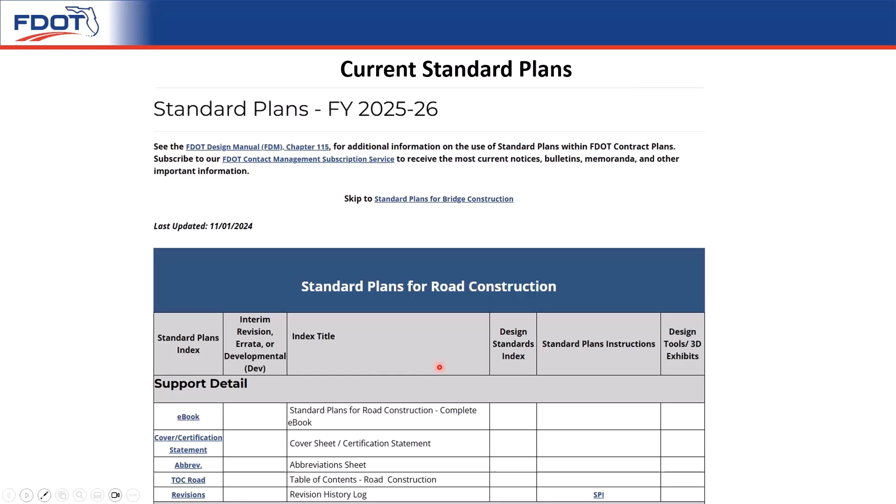You can see that we have the Standard Plans number and the titles listed here. We would also list any interim revisions or erratas in this column. Currently, we don't have any interim revisions or erratas for this edition, but if there were any, they would be listed here.

The Standard Plans instructions accompany the Standard Plans indexes and tell you information on the design criteria, pavement, etc. We would also have the design tools, if there are any, listed here. You can see that there may be a design tool spreadsheet, or there may be a 3D exhibit. It would be in this column for whatever index you're looking for.

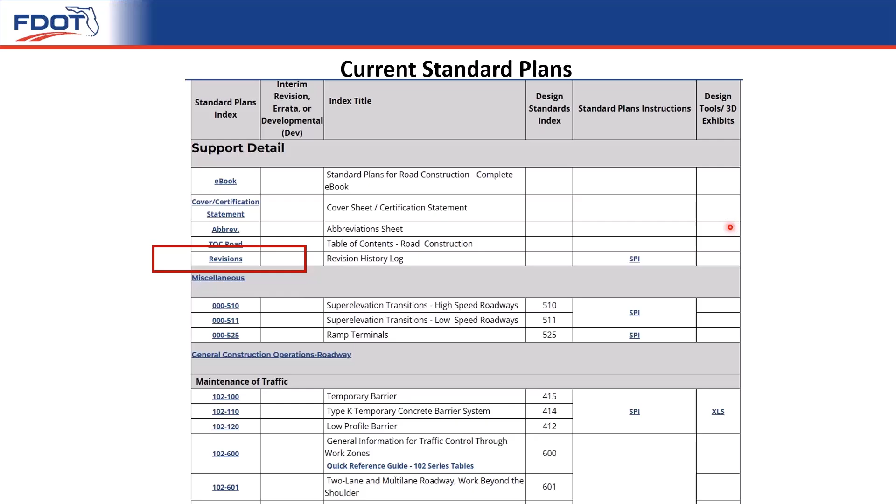Next, I want to highlight the revision history log. This is important because it's a complete list of the changes to the indexes for the year. This update that we're giving you today does not cover every single change, but the revision log does, and it goes index by index, sheet by sheet. So it's a great resource to go check and see what changes have been made.

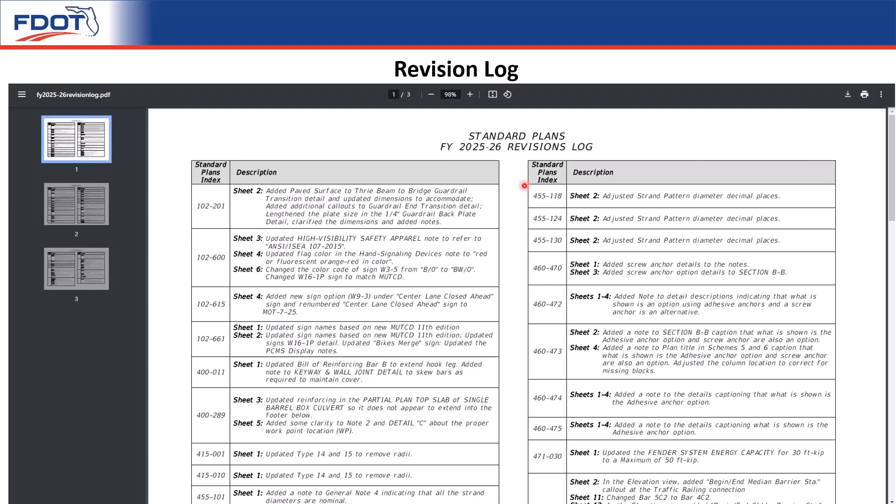Okay, back here on our Standard Plans website. Next, I want to show you the list of the previous editions of the Standard Plans. All of the versions of the Standard Plans can be found here. Back in 2018-19 was our first edition of the Standard Plans.

We also have the link to the CAD files for those standard plans here. You can use this link to see all the interim changes to the standard plans. We don't do a lot of interim changes. Interims require a bulletin, and mostly we'll try to update the standard plans within errata that I discussed before. But if there are any interims, they're listed on this website. We also have the link to the bulletin that releases the standard plans for that fiscal year, and the effective date of those standard plans.

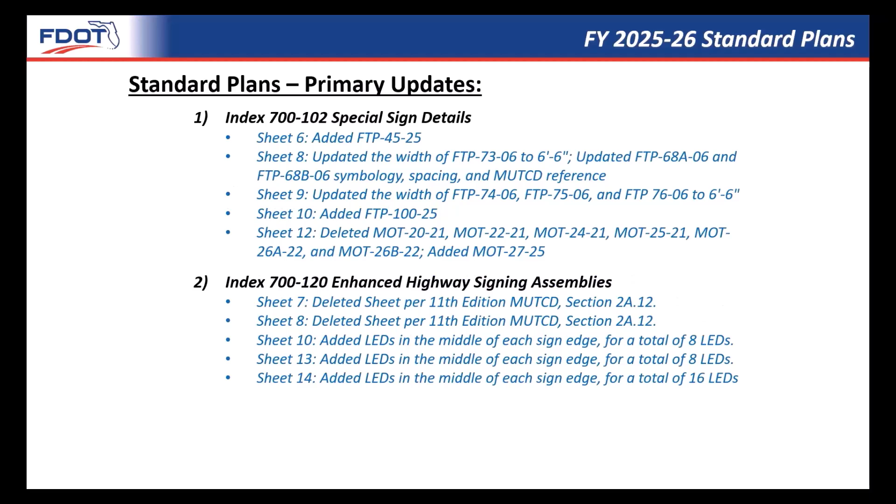In December of 2023, the Manual of Uniform Traffic Control Devices, also known as the MUTCD, updated their book to the 11th edition. Most of the updates I will be covering are to make our indexes consistent and compliant with this 11th edition. Here is a list of the following topics I will be covering: Index 102.600, 102.615, 102.661, 700.102, 700.120, 700.010, and 711.001. Our first index is Index 102.600, General Information for Traffic Control Through Work Zones.

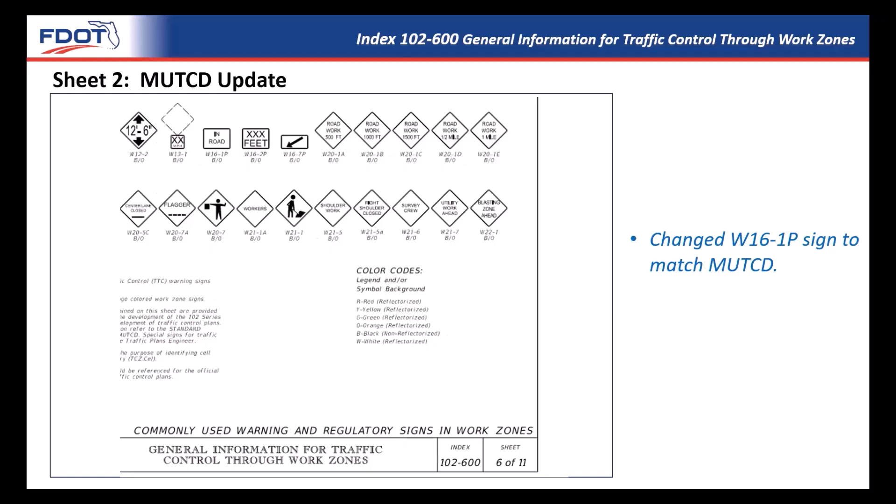On this sheet, we updated sign W16-1P to match the graphic from the MUTCD. So on the old sheet, we have the Share the Road sign, and on the new one, it's just the In-Road sign.

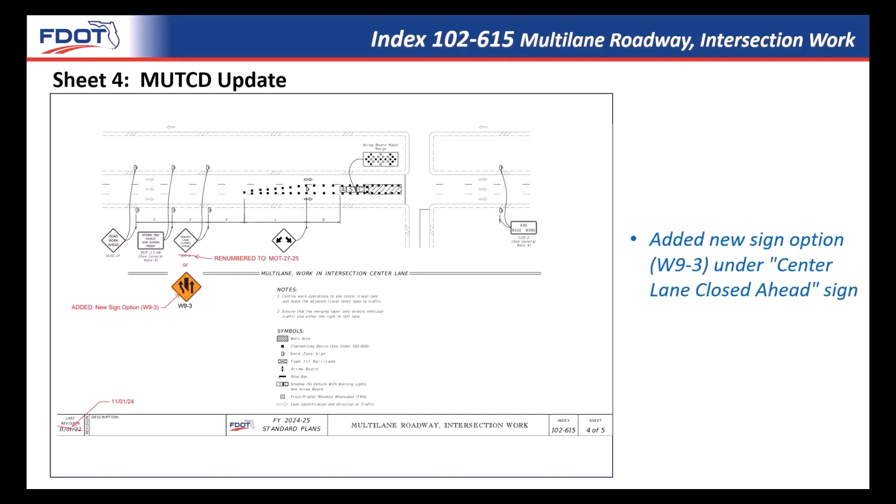The next one is Index 102.615, Multi-Lane Roadway Intersection Work. On this one, we added a new sign option, W9-3, under the center lane closed ahead sign. We also renumbered the older sign to an MOT number and gave you the option to use both. Here in our new book, you can see both options.

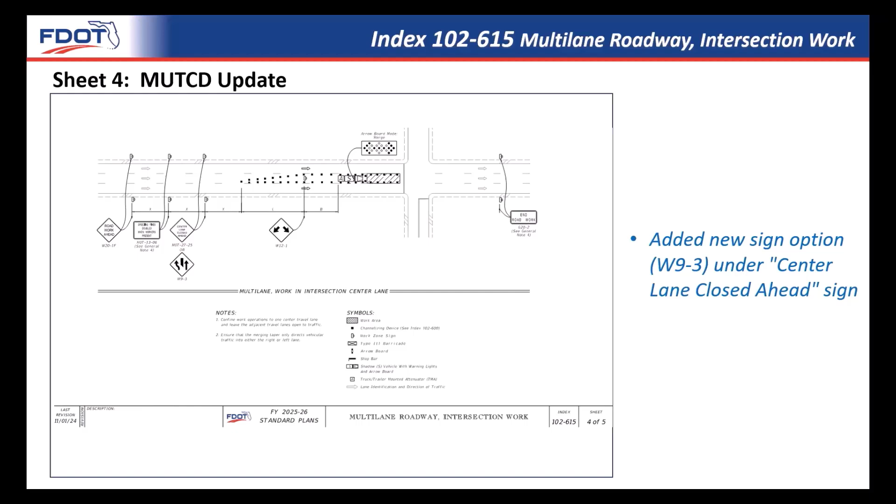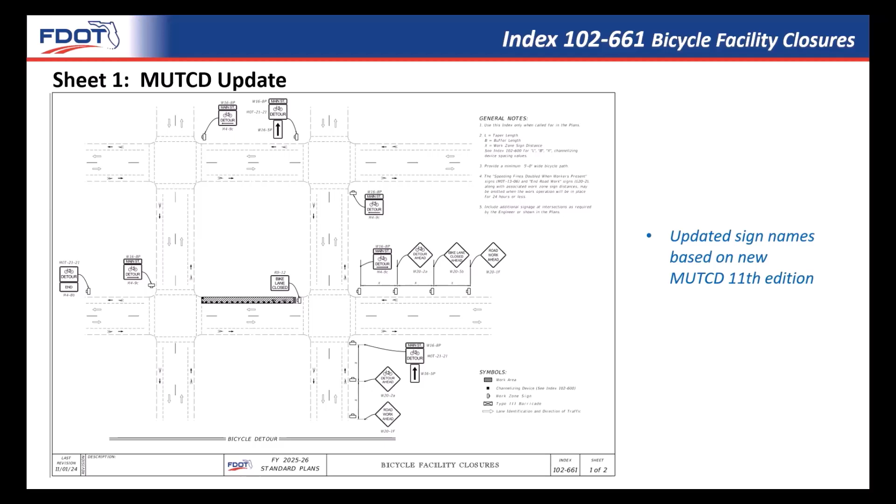Here you can see those new sign names on our new sheet. On sheet 2 of that index, you can also see that we updated the sign names to match the MUTCD.

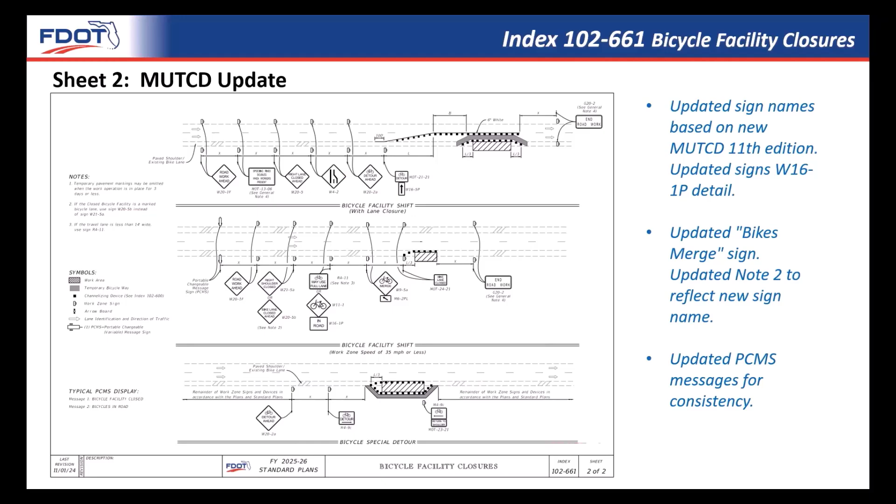We also updated the sign graphics on W16-1P to take away the Share the Road sign and change it to the In-Road sign like we showed on our previous index. We also updated the Bikes Merge sign to have the sign with the picture of the bike versus the word. You can also see that we updated the notes to match these changes. And here's the new sheet where you can see the new sign graphic and new sign names.

Up next is Index 700-102, Special Sign Details. On sheet 6, we added this FTP 45-25 sign. It's a Florida law buckle up sign that you would see at truck stops.

We also updated the sign name of the one before that to FTP 44A-25. And then we moved FTP 51-06 to sheet 7 to make room for the new sign. Here is the new sheet 6 with that new sign added in.

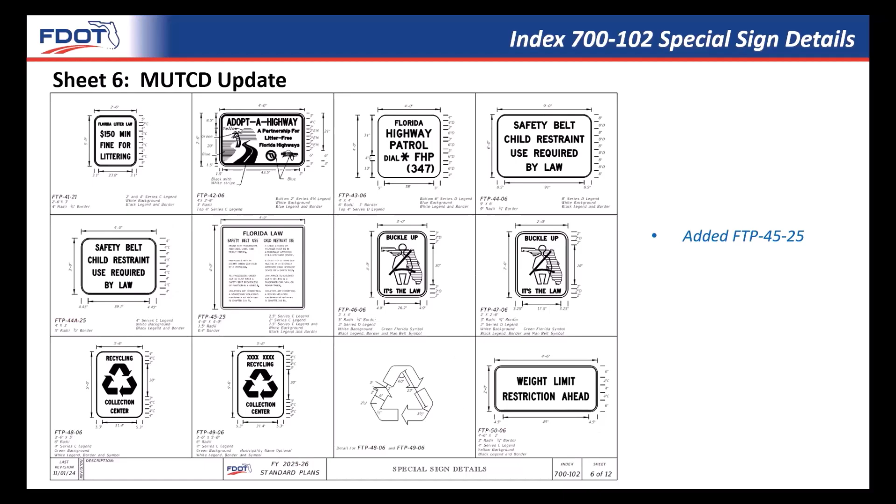On sheet 8, we updated FTP 68A-06 and FTP 68B-06 to match the symbology, spacing, and reference on the MUTCD.

We also updated the dimensions to FTP 72-06 to a 6-foot 6-inch sign in compliance with the MUTCD. These specific changes were done in coordination with the Traffic Engineering Research Lab. And here you can see the updated sheet with those new signs and a few signs shifted over because of that sign we added earlier.

On sheet 9, we updated the dimensions of FTP 74-06, FTP 75-06, and FTP 76-06 to be that 6-foot 6-inch dimension as we did on the previous sheet. And here is sheet 9 with those new dimensions.

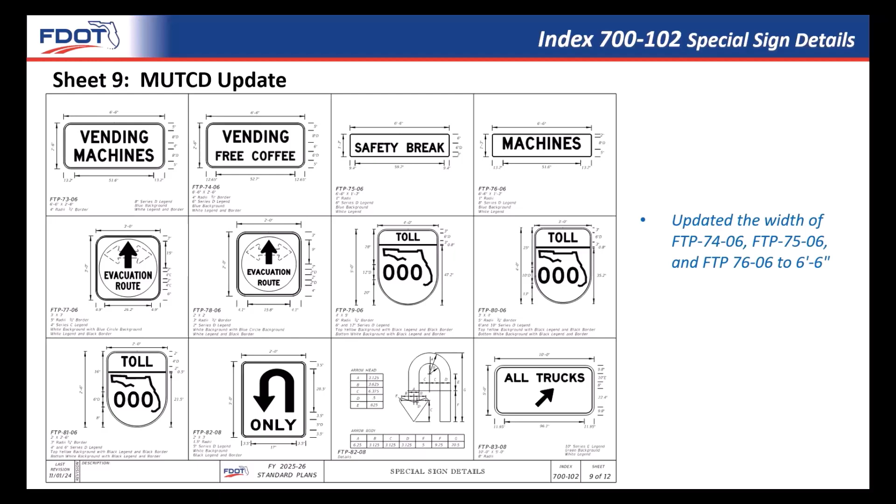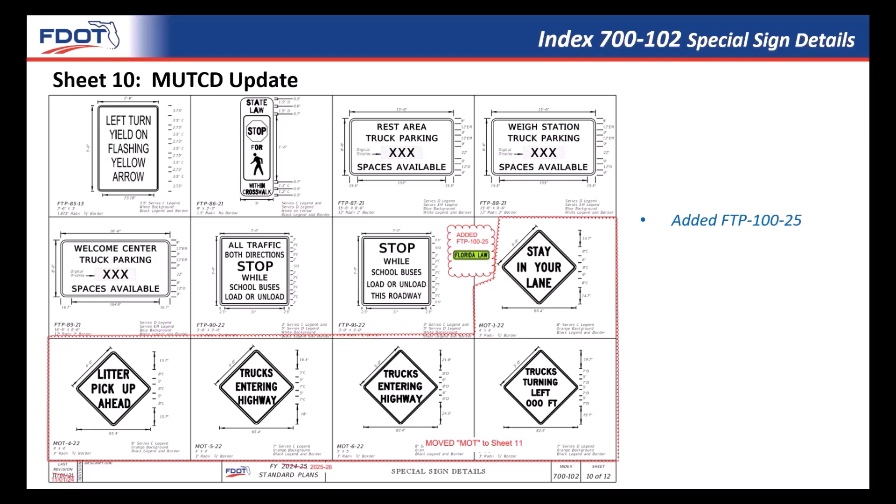On sheet 10, we added this FTP 100-25 yellow Florida law sign. And then we moved all of the MOT signs from this page to its own sheet to make it more clear through our standard plans. You can see that here.

On sheet 12, we deleted multiple signs. The 11th edition of the MUTCD now includes work zone bike warning signs, which means some MOT signs shown in this index can be deleted. Additionally, the 11th edition of the MUTCD includes temporary traffic control typical applications for work in the vicinity of bicycle lanes and shared use paths, which specify what warning signs need to be used and where they should be placed. Consequently, the bike lane closed ahead plaques, MOT 24-21 and MOT 25-21, will no longer be used.

We also added in the MOT 27-25 center lane closed ahead sign. And here is sheet 12 with those deleted signs and our new added sign.

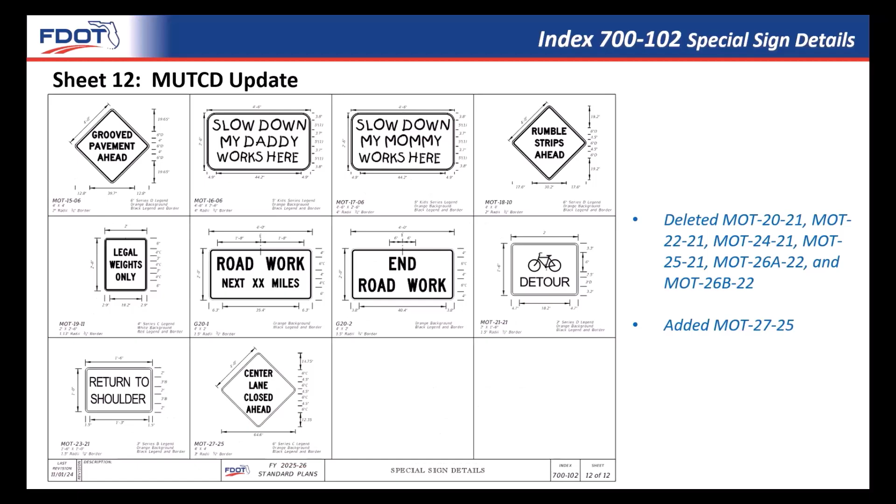The next one is index 700-120 enhanced highway signing assemblies. We deleted sheet 7 per the 11th edition MUTCD section 2A.12. We also deleted sheet 8 for that same reason.

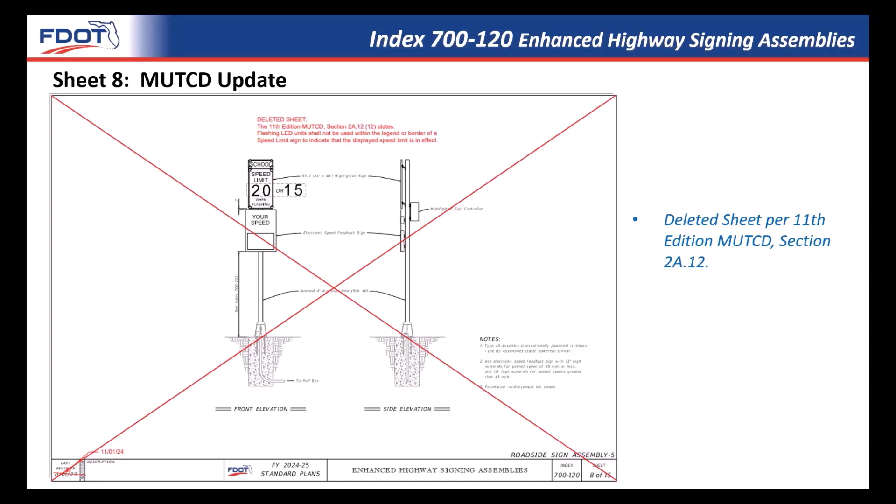On sheet 10, we added LEDs in the middle of each sign edge for a total of 8 LEDs in this wrong way sign. You can see that update here with all 8 LEDs.

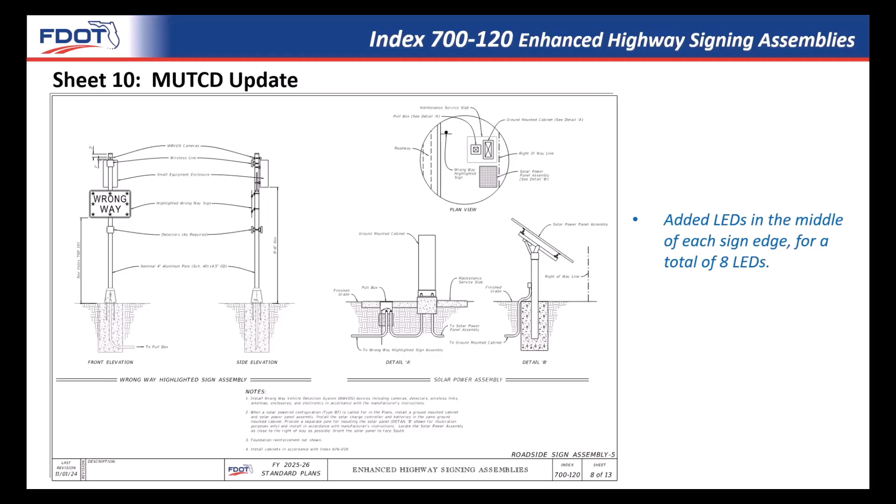On sheet 13, we added LEDs in the middle of each sign edge on the Do Not Stop on Track sign for a total of 8 LEDs. And there's the update to that detail as well.

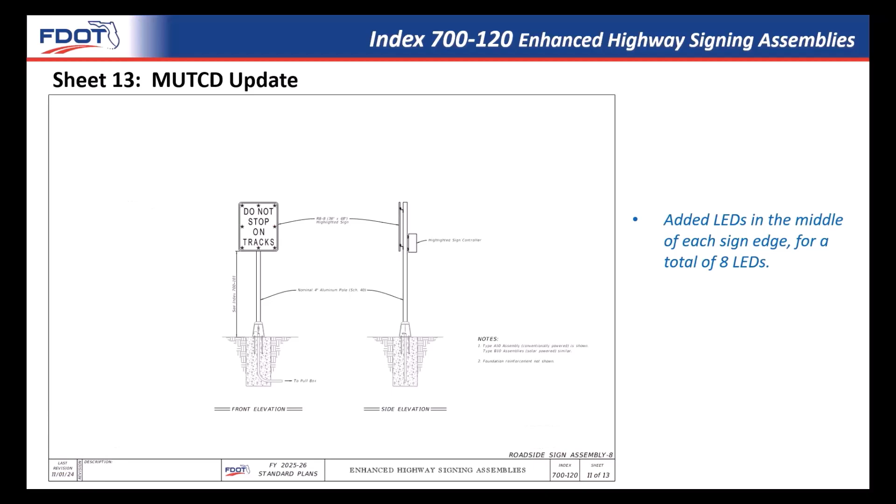And finally, we have sheet 14 where we added LEDs in the middle of each sign edge on the stop sign for a total of 16 LEDs. And you can see that here.

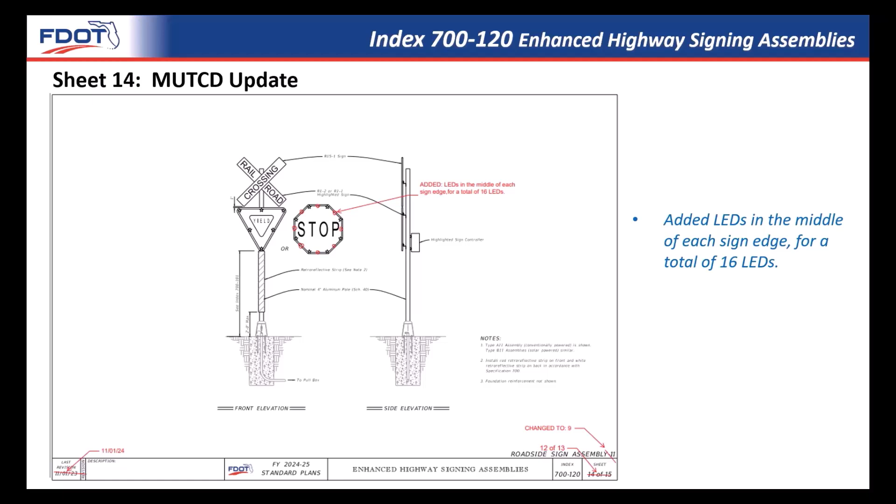Next, we have index 700-010 single column ground signs. On this index, we updated the flip sign to allow for multiple sign panels, removed the diamond sign panel, updated note 1 to say install sign with the ESU sign panel in the undeployed up position. We added note 5, which says multi-sign panel assembly only, use one of the following approved sign messages, actual sign may need to be scaled: FTP 43-06, FTP 47-06, and FTP 66-21. We also added ESU to the sheet title.

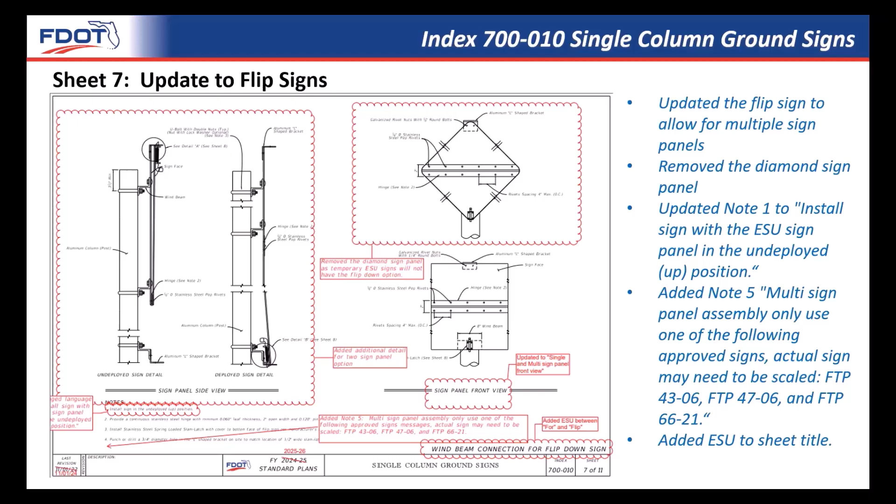The changes to this index are coming from the head of Central Office Traffic Operations Office based on a request from the District Traffic Operations Engineers to allow for multiple sign panels on the ESU flip sign. We updated the standard plan to allow for 2 sign panels, and this was approved through the Traffic Operations Office. We also removed the diamond sign panel as this is not used for permanent ESU signs. And here is that new index with those updates.

The last index I'm going to cover today is index 711-001 pavement markings. On this sheet, we updated all references of buffered express lane to managed. So you can see where it says buffered has all been moved to say managed express lane.

We also updated the express lane markers to be tubular markers and deleted some outer lines on the detail to match the detail of the whole picture.

This was done in coordination between FHWA and the FDOT Traffic Operations Office, which resulted in changes to the FDM and TEM to make them all coincide with the MUTCD. You can see that here, where they now all say managed lane instead of buffered express lane.

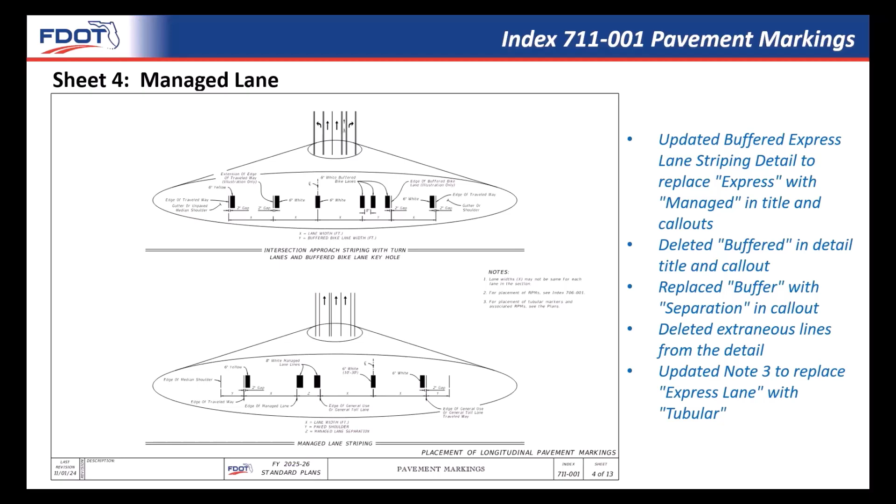For the fiscal year 2025-26 Standard Plans update cycle, I was primarily responsible for the following: temporary barriers, concrete barrier at toll sites, guardrail connections for existing bridges, fiber optic splice vault, standard aluminum lighting, and the utility conflict light pole. So first up is the Index 102 series, temporary barriers for MOT or maintenance of traffic.

We've made some additions to the standard plans instructions. This addresses the single slope connections and some constrained conditions. So in the standard plans instructions for the 102 series, we've updated Part A.

And that would be very similar to the F shape or the vertical shape. That's basically shown on the left here. These details are copied directly from the current 102 series.

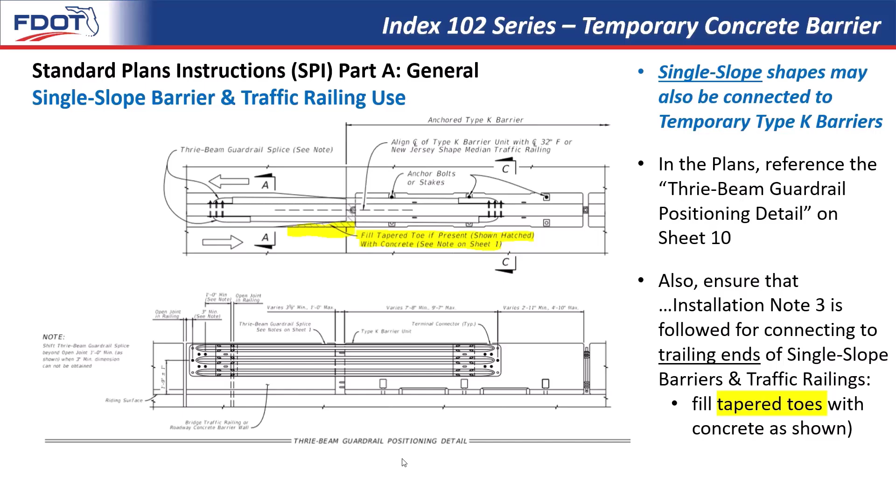For traffic moving from left to right, that's just to prevent any snagging on the toe of that temporary type K barrier, so you just go ahead and smooth that out. So again, you can show a connection to single slope in your plans currently, and that's fine so long as you just reference this Thrie-beam guardrail positioning detail.

Next up, we're still in the standard plans instructions for the temporary concrete barrier, the 102 series, and this time we're looking at Part B for shielding hazards.

In this case, we wanted to add some additional clarity on what's needed for the length of these barriers. Previously, it had just given some information on meeting the length of need, like you would design for a new permanent barrier. But for the case of temporary barriers, some additional considerations and leeway is given.

So we went ahead and defined that to better work with the standard plans index details. The first goal, as with any barrier, is to meet the full length of need requirements wherever possible, wherever there's no project constraints. If constrained conditions are present, then you follow the updated SPI guidance, which is shown at the left.

So just so you all know, this drawing is from index 102-120 for the low profile barrier, for a driveway, showing work area behind it. Essentially, if you're to end the barrier and start the barrier again this way, that is acceptable, and so the notes cover that.

So again, this new text reads: for constrained conditions that prevent meeting the full length of need, such as those required for median openings, side streets, or driveways, extend the barrier to the farthest extent possible while providing for the safe movement of traffic.

We mentioned those side streets or driveways, which alludes to the index drawings down here that explain how to handle a driveway. And then another consideration for the taller barriers, when they're placed in the median, you'd consider those clear sight triangles per FDM 212.11. So we went ahead and mentioned that.

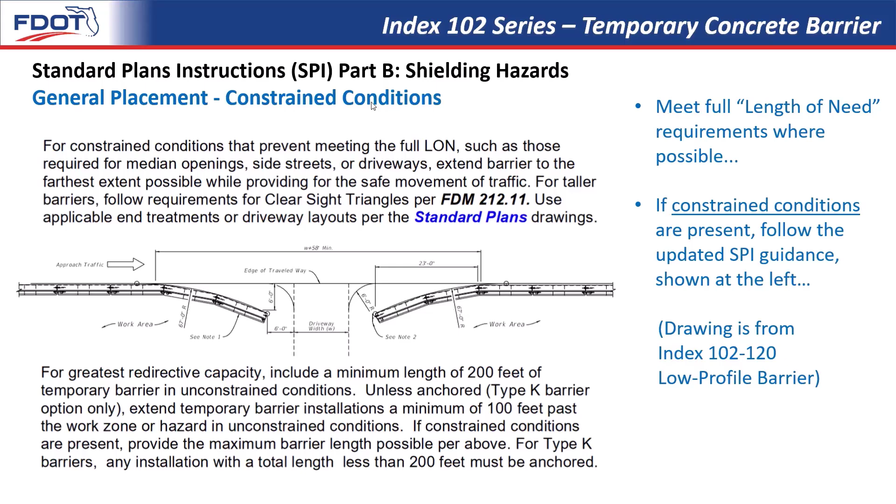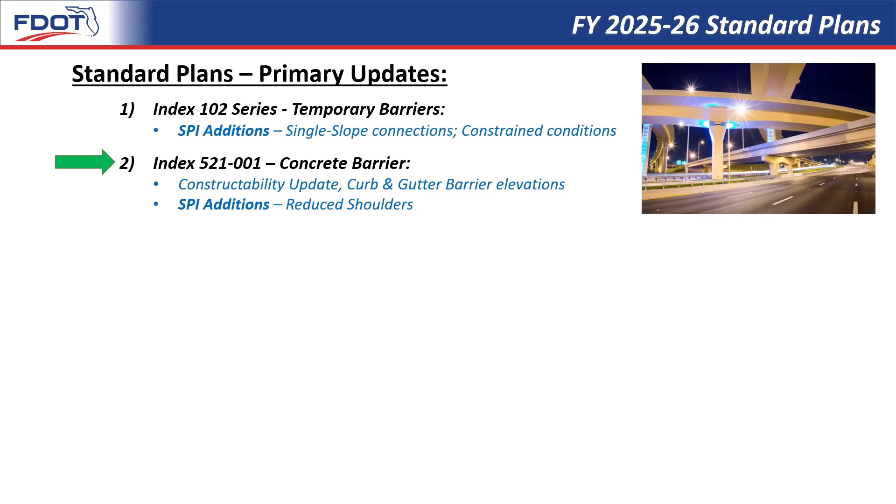Next up, we have Index 521001 for concrete barrier, where we've given a small constructability update, and we've added an elevation requirement for the curb and gutter barrier. Additionally, in the standard plans instructions, we've added some information for reduced shoulders.

First up, here we are looking at sheet 20 in the standard plans index for curb and gutter barrier. The maximum elevation has been added for the finish grade or the sidewalk that's right here behind this barrier. The finish grade elevation, including sidewalks, is 7 inches max above the footing. As you can see right here, this little elevation has been added, and that's basically measured to the finish grade elevation touching the back of the barrier, then measured down to the top of the footing.

So basically placing a maximum cap on this finish grade elevation ends up being a 31-inch minimum pedestrian railing height. That's similar to the guidance provided for guardrail when there's guardrail present, and that's in FDM 222. This barrier is crash-worthy from vehicles on the left-hand side, and on the back side, on the right side, it's essentially doubling as a pedestrian railing. That's 31 inches minimum if you follow this dimension right here for 7 inches max.

Then another small revision was added throughout the entire standard plans index. In all of the elevation views, not just curb and gutter, but also shoulder barrier and median barrier, we went ahead and added the begin end barrier station where it would be measured and where it would correspond to the plans, basically at the connection point to the traffic railing. For all barrier types, for pay and measurement, we have begin end barrier station on the left side, begin end barrier station on the right side.

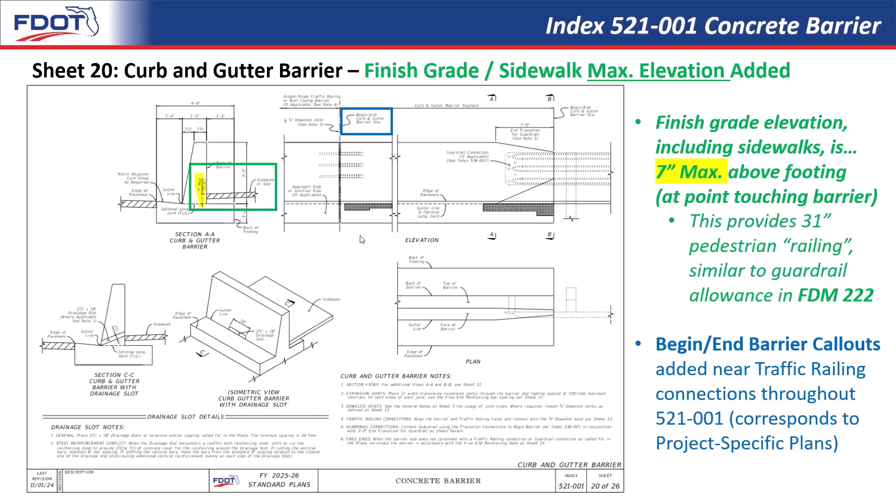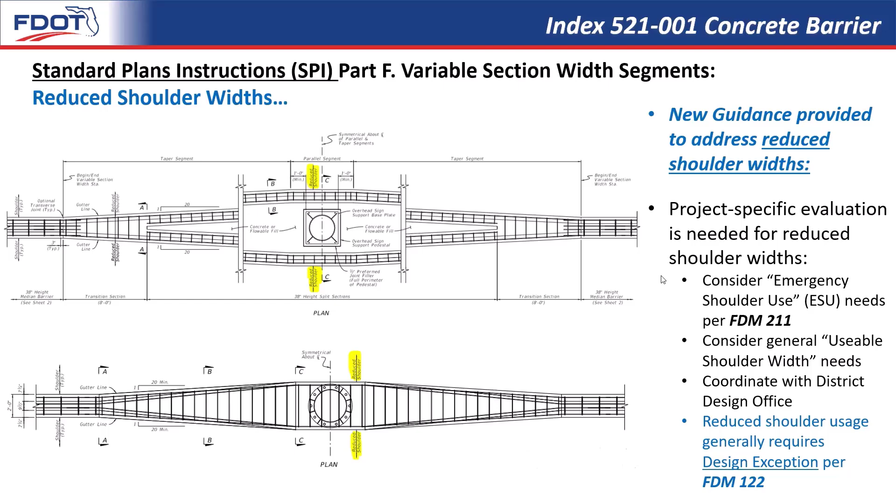Again, this SPI isn't really providing much new information. It's just a reminder, letting you know that just because this says reduced shoulder width, it doesn't allow you to then skip over all of these evaluations that would normally be needed for reducing a shoulder. Hopefully that would help to clear things up more quickly for the designers and save some time, so they know what they need to be considering. Again, that's in the SPI part F.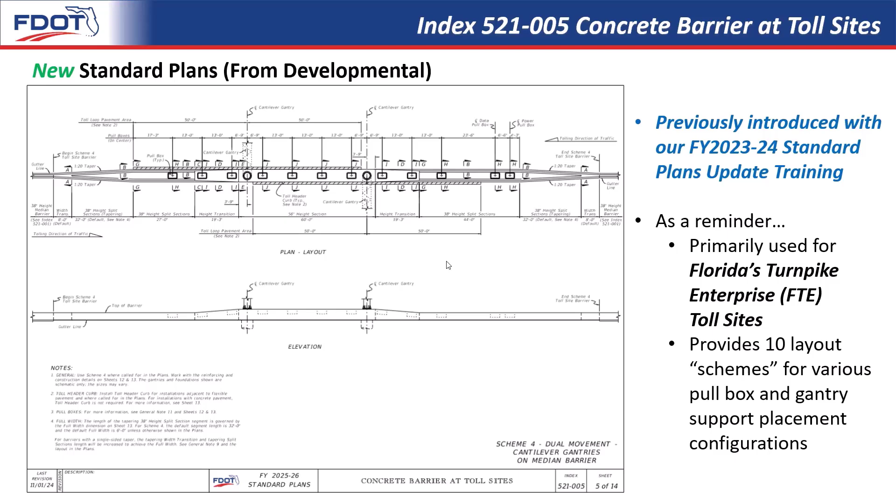The major need for this index came about when Turnpike designers were trying to create all these complex barrier shapes on a project-specific basis, and they weren't providing any real reinforcing details. So here we went ahead and handled that in a standardized way.

An innovative piece of this index is that it uses glass fiber reinforced polymer reinforcing, also called GFRP, throughout. That's basically non-metallic, and the whole purpose is to avoid interference with toll site detection equipment, which has gotten very sensitive, detecting the number of metal axles in each vehicle. So not having this metal all over the barriers really helps.

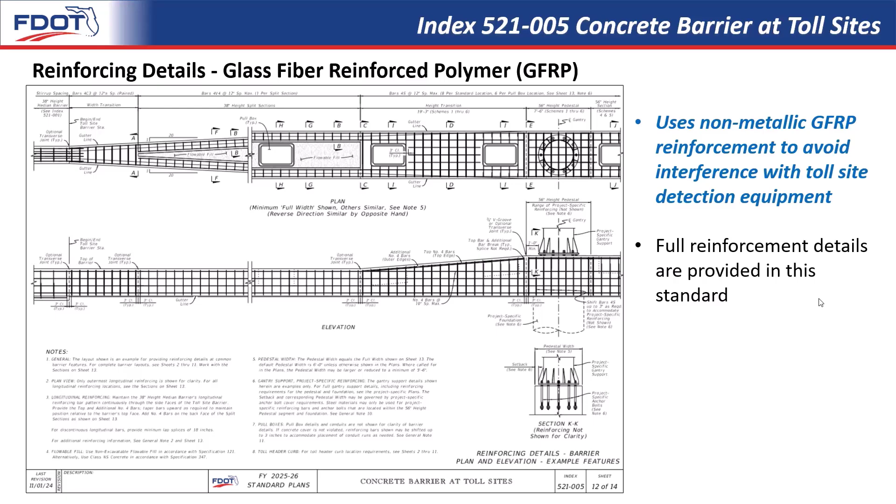So these full reinforcing details are provided in this standard, as you can see. And then next, something that's truly all new that's been created for this cycle are the standard plans instructions that go along with that, so now the designer has some more information to get them started.

As a reminder, those standard plans instructions do give information for the designer on how to implement those standard plans and have them coordinate with the project specific plans. These are essentially defined in the FDOT design manual and sort of serve as an extension for that information for designers that's actually index specific.

Specifically for concrete barrier at toll sites, these SPIs let the designer know that these standard plans work in coordination with the Florida Turnpike Enterprise's general tolling requirements. So right off the bat, it lets the designer know where to go look for additional information. You can see that's also known as the GTR, highlighted in bold in the first paragraph of this SPI.

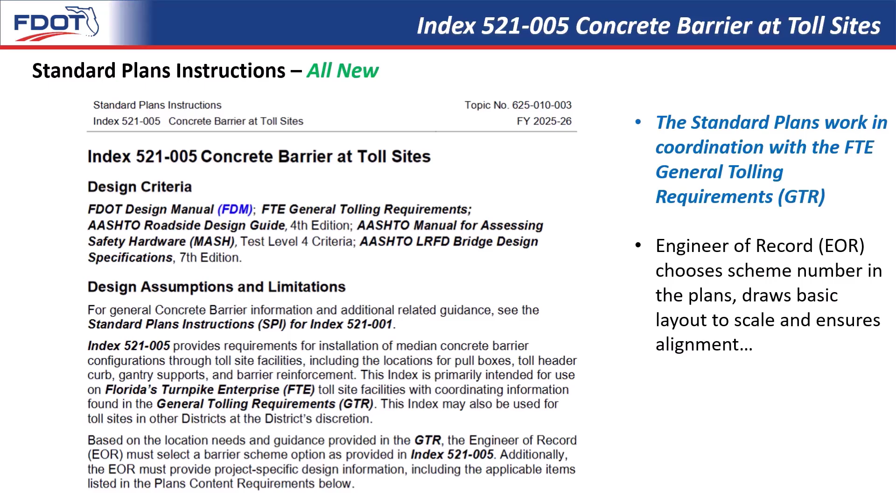It also lets the designer know that the engineer of record chooses the scheme number in the plans, draws the basic layouts to scale, and ensures all the alignment. So just the basic responsibilities of the EOR.

And then scrolling down in that same document, the SPI explains the project-specific design information in Part B. It's definitely worth noting that toll sites are relatively advanced, lots of electronic equipment, lots of specialized structures, so there's a significant amount of project-specific design work required from the EOR. To save the designer a lot of time, we just listed those things out in a pretty concise way.

Essentially what this is doing is coordinating with the general notes in Index 521-005. So if you were to read through those general notes in the index and recognize all the project-specific information that's needed, that would lead you to the conclusion of the things you're seeing in this list.

Without getting too deep into the weeds, we're just going to let you know here today what topics are addressed, and then when you go and look at the SPI, it'll guide you to where to find more information about those things. So going down our list, this SPI mentions project-specific needs for the minor grade separations and how to call those things out in the plans, typically labeled at the gutter line.

Single-sided tapers - if you have a taper transition only on one side of the barrier, it then extends the length of that barrier. That can be controlled in the plan view, and so that's mentioned here.

Project-specific gantries and supports, just like with the regular 521-001, that does require a structural EOR to design that foundation and design the reinforcing steel that goes through the barrier, because every project-specific gantry is different and has a different load, and a lot of times there's different space constraints. So that does require a structural EOR to be involved.

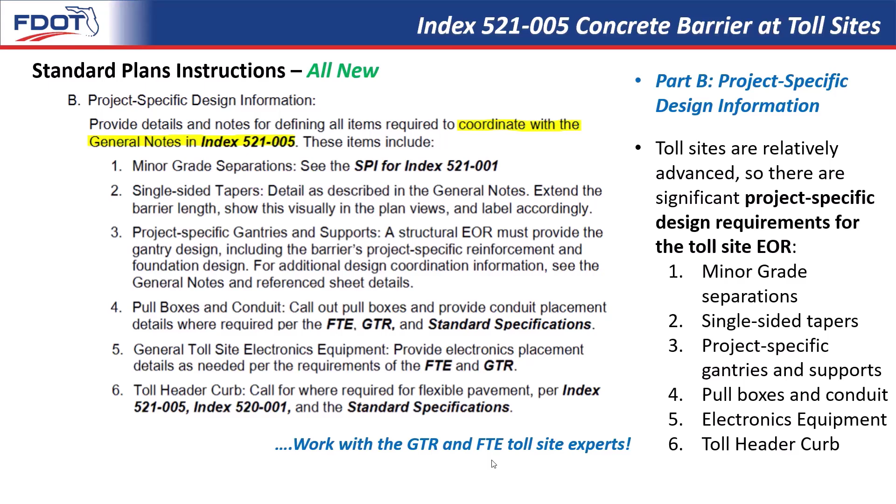Okay, and now shifting gears to Guardrail, we're going to take a look at Index 536002, where we have guardrail connections for existing bridges. We've made a constructability update for the tolerance of the longitudinal placement of the connections. And then we have some SPI additions, which involve the responsibilities of the EOR.

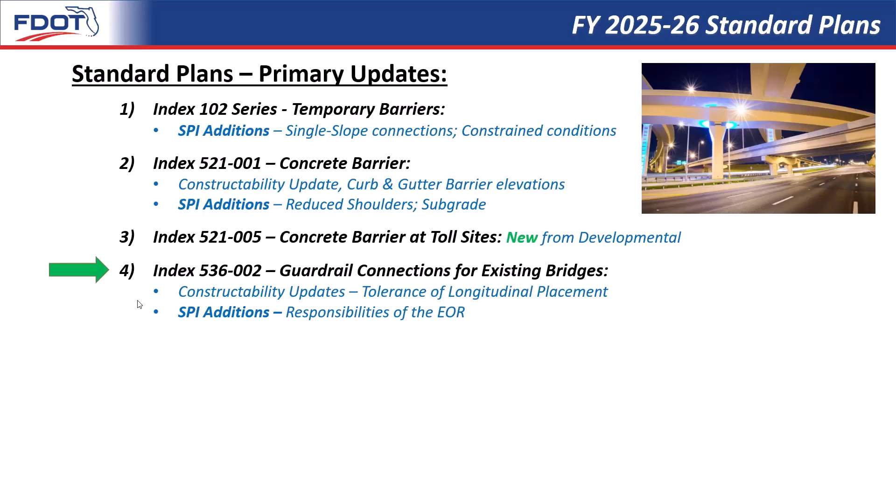On sheets 27 and 28, where we have guardrail connections to general types of bridges with safety-shaped traffic railings that extend less than the full length of the approach slab - so that's the old way of doing it, but these are the general connections.

And so basically the tolerance has been added for the distance between the end of the concrete barrier and the center of that guardrail splice.

So as a result, we'll zoom in a little bit. Basically, you can see the end of the concrete here, and then that 7¼ inches measured to the center of that splice. You know it's the center of the splice based on that typical 6'3" measurement that goes from the center of the splice to the center of the splice on a panel.

And so that tolerance is very helpful, particularly for an existing condition where you're basically through bolting a concrete barrier and attempting to avoid whatever existing steel is in there. And in general, just working with existing conditions and trying to avoid whatever surface irregularities are around with the posts, it does help to have that little bit of wiggle room for a tolerance.

And so we did research nationally regarding crashworthiness and what some other states have done. And it's determined that 7¼ inches is reasonable, and that plus or minus 2 inches is also not expected to affect the safety performance. So we went ahead and added that to help out the inspectors and the contractors.

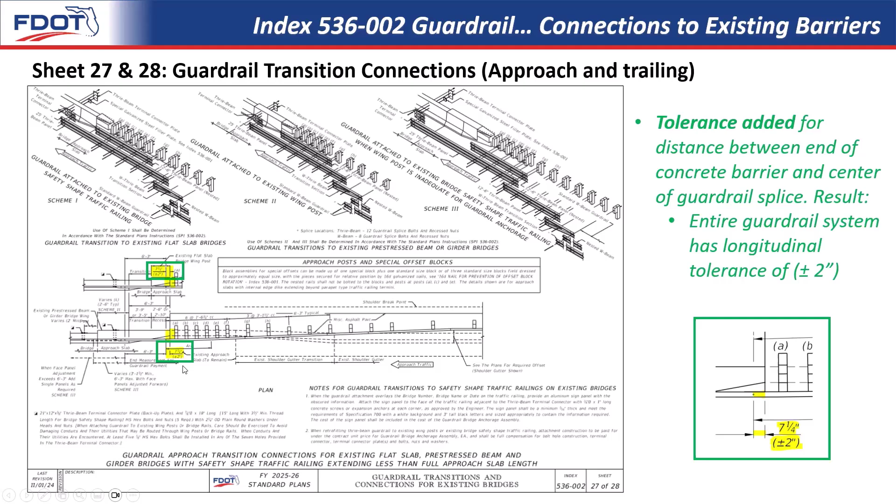And then next up in the same index number, we're now looking at the standard plans instructions, or the SPI. And so here are just showing some example drawings from the standard plans. The standard plans depict numerous cases of existing bridges and railing retrofits that could be used that are all defined in a lot of other standard plans index numbers. And so index 536002 was designed to coordinate with all those other standard plans indexes.

And so this is a fairly complex topic that does involve some engineering design work. That's why we need those EORs out there statewide. Unfortunately, what had happened in some cases is that the EOR would have simply in their plans said follow 536002, despite the fact that there's numerous options. And this really isn't something that was ever intended to be left to the contractor to make all these decisions on standard plan selections on exactly what type of options they're supposed to be picking.

And so now in the SPI and the design assumptions and limitations, it just further clarifies that the EOR must provide the project-specific traffic railing and connection scheme information in their plans. So that's project-specific information that needs to be provided so that the contractor knows exactly what to look at and they can begin their work without doing their own design work.

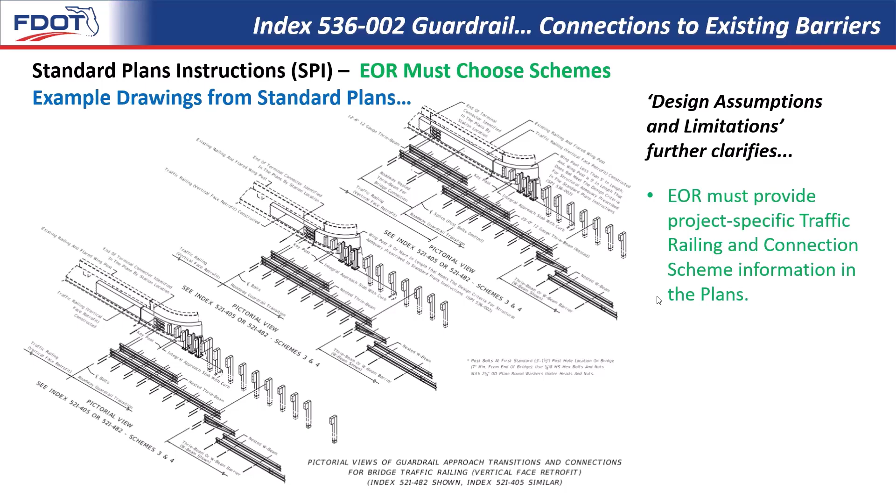And so, for example, the project-specific plans would obviously have to call out the type of railing that's being used. So it would just be, for example, railing index 521-405. And then for the guardrail connection, the EOR would call out index 536002, sheet 22, scheme 3. And so the contractor could look at what matches their case, and then they know how to handle that.

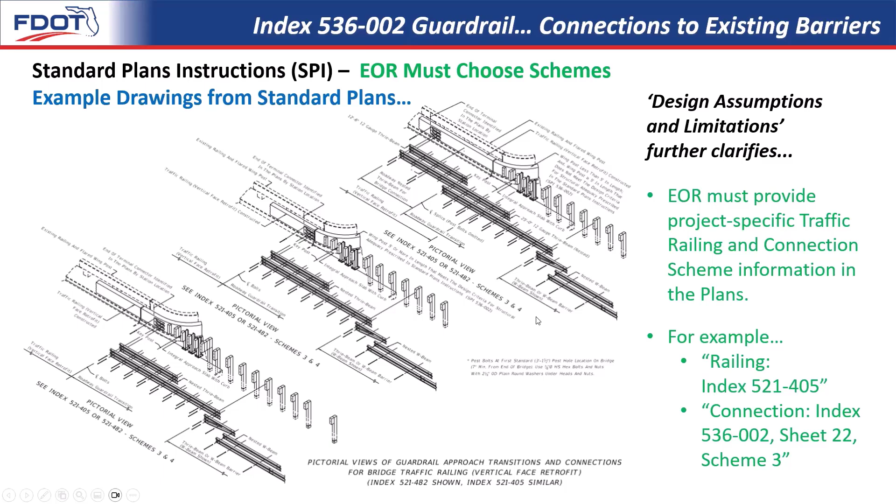So again, just like a typical guardrail design, if you're designing for an existing bridge, to look at 536002, and then you call out that scheme option and exactly which indexes correspond to each other so that the contractor knows what to look at.

And with that, we're turning the page from our roadside safety items, and now we're going to look at index 635005 for the fiber optic splice vault.

And so this was recently published as a developmental standard that needed central office approval, but now it's being moved to a regular index 635005 that no longer needs central office approval. So now it's just a normal standard plan. And for that reason, we'll give you a quick review.

All right, and so again, this was previously introduced with the fiscal year 2024-25 standard plans update training as a developmental back then, but now just a regular index number. There's no more D in front of there. And so designers are free to use it as they see fit.

So quick reminders, this is primarily used for the Florida Turnpike Enterprise medians to facilitate their fiber optic access points and connections. This was developed because in the past, each project-specific set of plans was ending up having to use shop drawings from multiple vendors to define everything here. And so we recognize that a lot of time can be saved, a lot of economy of scale could be captured by standardizing this item that tends to be repeated on lots of projects.

And so the result is what you see in front of you. The Structure Design Office designed this for the H20 loading to accommodate maintenance equipment that would be typical out in a median. This uses the Type 3 manhole per Index 425001. And so again, it's that economy of scale and just using existing parts and pieces from our other standards. You can see that the Type 3 manhole is called out in a few locations and explained in the notes.

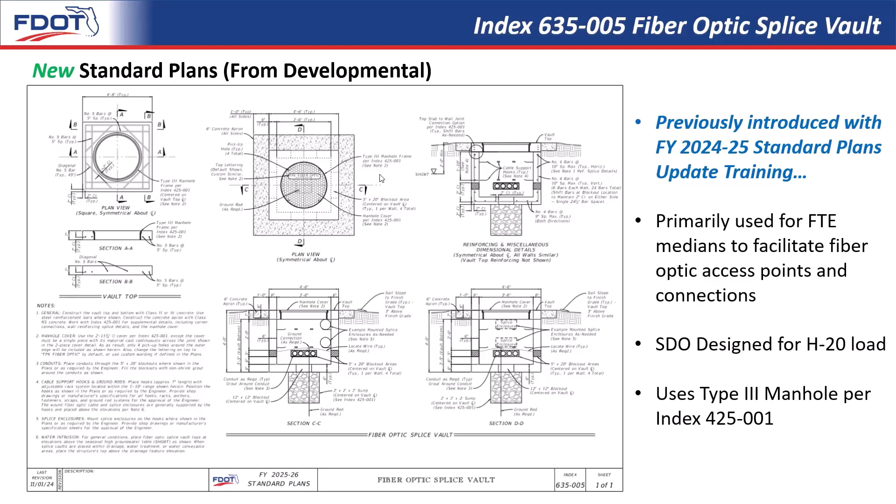Standard plans instructions to go along with this are all new for this update cycle. It explains the design assumptions, that this is primarily used for FTE, Florida Turnpike Enterprise, and may be used in other districts at the district's discretion. Also, it was a request of industry that project-specific designs may still be used if they're signed and sealed by a Florida professional engineer, and again it has to meet that AASHTO H20 loading. That's explained in the text here.

Some brief plan content requirements are mentioned. Basically, you need to call out the vault in the plan view. It explains how to define the orientation, and then one last thing to coordinate with the notes in the index.

The default lettering on top of the manhole top may be changed with the plan's call out, explained down here in the last paragraph. Basically it just says the default lettering on the manhole cover top is TPK fiber optic. To change this wording, you can place a project-specific call out in the plans. For example, you just say next to the call out 'manhole custom wording' and then FDOT District 5, and put an arrow pointing to that. The index note will also clue in the contractor that custom wording may be possible, so they need to look for that. That concept is explained in this Index 635005, Note 2.

The vast majority of cases will be in the turnpike. If you happen to be using it for something else, you can change that lettering on top of the manhole - just call it out in the plans.

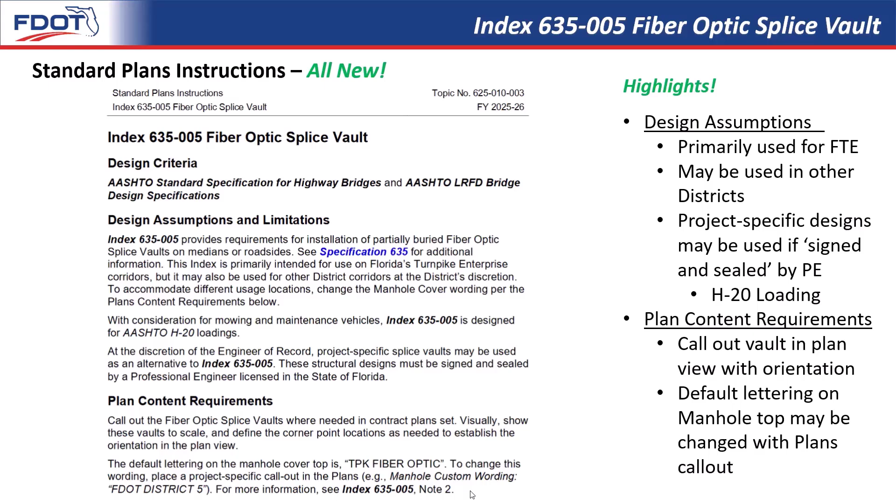For our next standard, we'll go ahead and take a look at Index 715002 for standard aluminum lighting. Here we did a CAD refresh throughout, got some miscellaneous updates, and some new arm options.

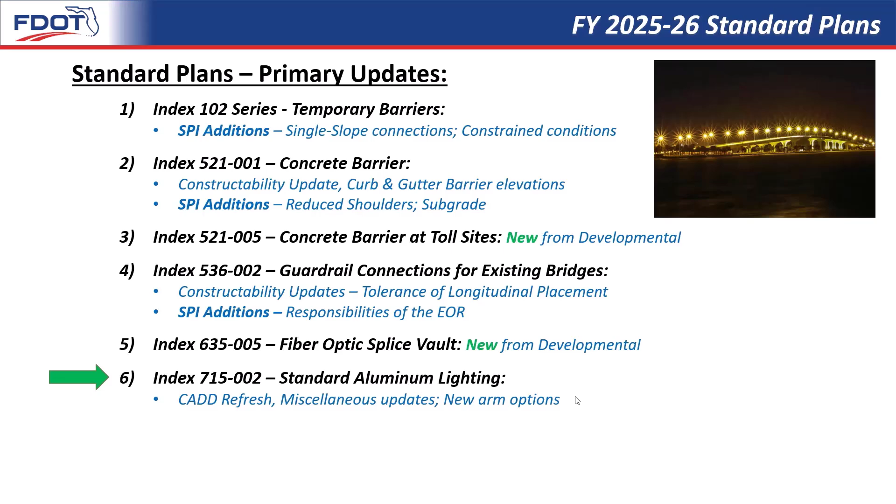Just mentioning something behind the scenes, this particular index has been around for decades. A lot of the drawings were completely not to scale, not using our current CAD practices and symbology, although for standard plans we do use pretty basic symbology because there's no quantities being done. But in general we would like to have everything drawn to scale. We know there's a lot of project-specific designs that take place, and our DGNs are available on the Standard Plans website, pretty easy to find. So when anybody starts to work with those CAD files and opens them up, and they're all drawn to scale perfectly, it makes things a lot easier.

I have to give credit to Shay Gibbs. She's done a tremendous job helping Darren Martin and Rick Jenkins organize these publications for the last couple of years, and give us a new publication system internally. In addition to that, she's been doing a lot of great CAD work. Shay went through all 9 sheets and upgraded everything to scale, essentially redrawing a lot of things, and very much appreciated. So all these things are now drawn to scale for any designer that needs to go to those DGNs on our website and use them.

In addition to that, just making it look like our other standard plans, we reorganized sheet 1 a little bit and added a table of contents to help find your way around, just trying to give all of our standards the same look and feel.

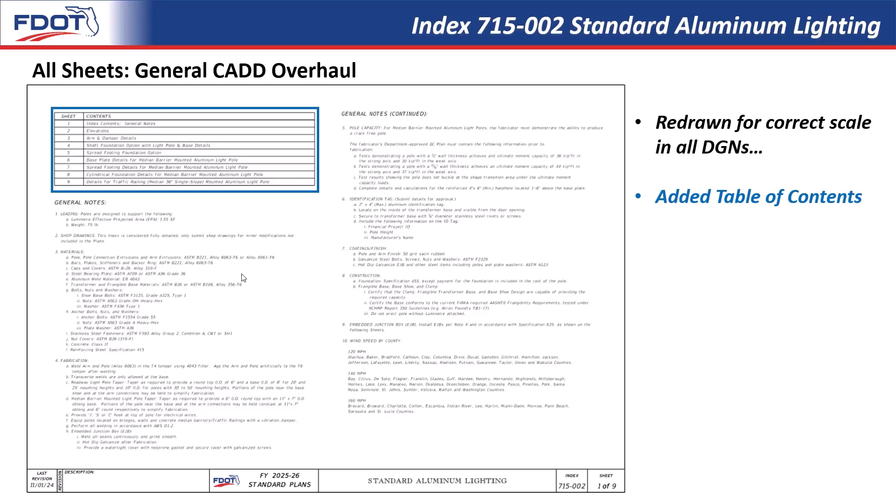As part of the CAD refresh, believe it or not, a couple designers asked about this - we were still showing the old high pressure sodium graphic in 715001, we showed the graphic for the LED luminaire. Now everything matches, all upgraded to look like modern technology now, just essentially keeping up with the times.

One of the content changes, actually requested by a designer, is for these median barrier mounted light poles to basically only have one arm or have a pole top mount available. While it wouldn't really be practical to show every possible combination in these elevation views, we just handle those things in the notes, and then it shows up as an option in the pay item. So all we do is essentially say that the double arm is shown here in parentheses, but the single arm and top mount are similar. When you say there's something similar, that just means it's permissible, it's available. So if you do need to use a single arm just for one side, you can go ahead and do that now.

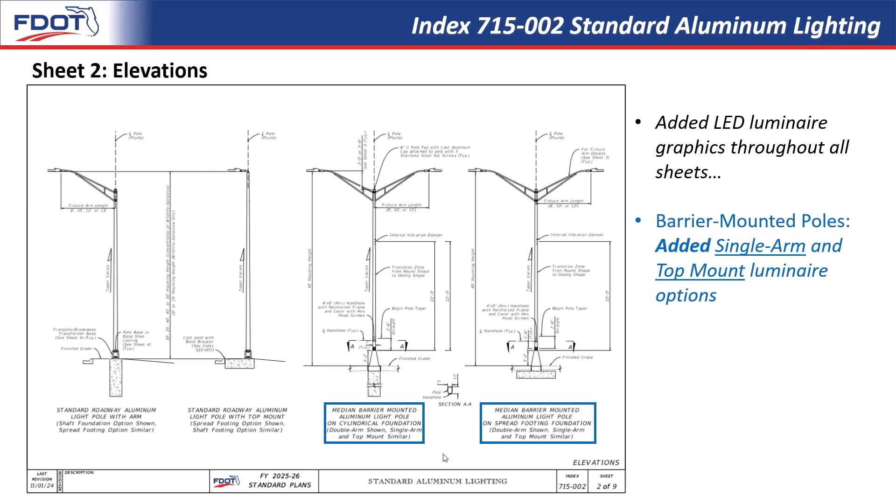And then last but not least, we'll take a look at one of our newer standards, 715003, for the utility conflict pole. Here, upon request, we've added a new spread footing option. So I'll just show you what that looks like.

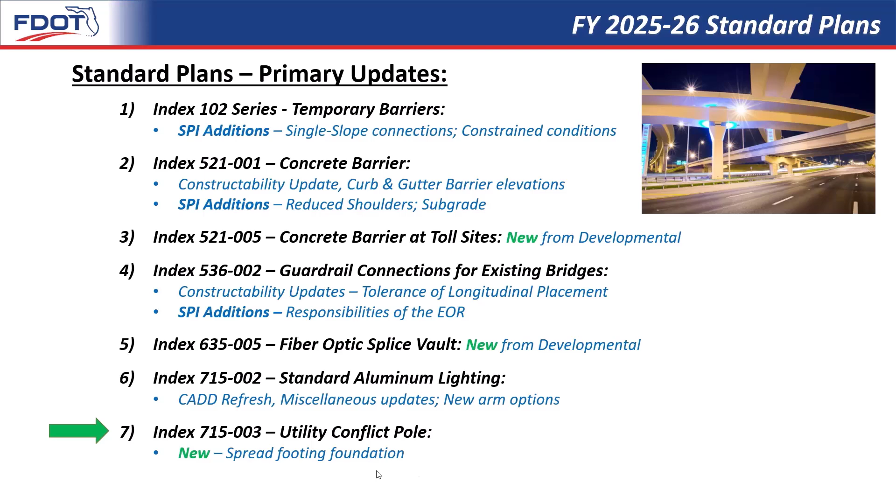So I'll quickly show you sheet 1 so you remember what a utility conflict pole looks like. It essentially has a really tall rise and a really long fixture arm. The purpose is to avoid utilities like overhead power lines, and this option has ended up being fairly popular.

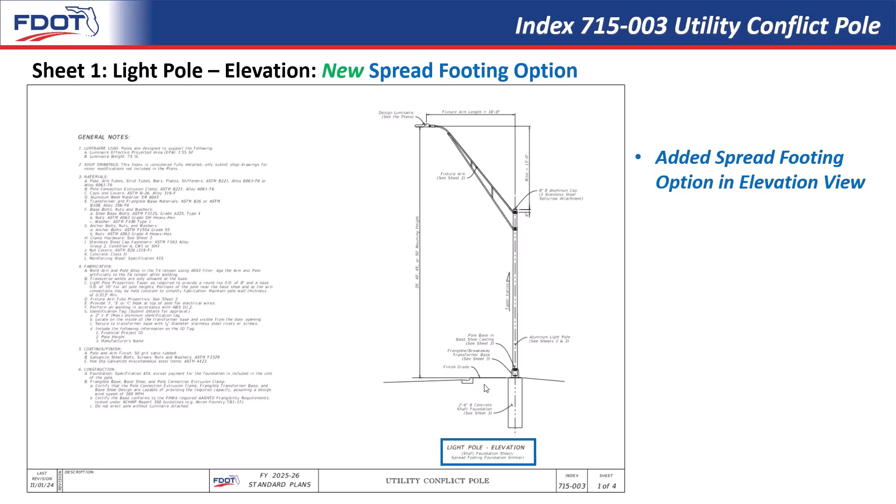The small change made to this sheet based on our new option is that, again, the devil's in the details, so you could read these little notes in parentheses. Now it says the shaft foundation is shown, but the spread footing foundation is similar. When we say something is similar, that means it's permissible, it's available. So there is a spread footing foundation option now. This elevation shows an example with most of the common features, but this foundation down here, a spread footing foundation, can be used instead.

And so the spread footing foundation is now shown on sheet 4 of 4. This should look very familiar. It's almost identical to the spread footing foundation that's available in 715002 for the standard type of light pole.

So quickly we'll mention the benefits. It saves space for constrained conditions, typically used in urban areas where there's really no grassy area to mount a pole. It basically avoids underground utility conflicts because it's very shallow. It doubles as a sidewalk surface, mounted where there's a sidewalk on either side, and pedestrians would just walk right by it, right on top of the spread footing foundation. For that reason, it's designed to meet the FDM 222 clearance needs for pedestrians, so that minimum lateral width of the sidewalk is met by default.

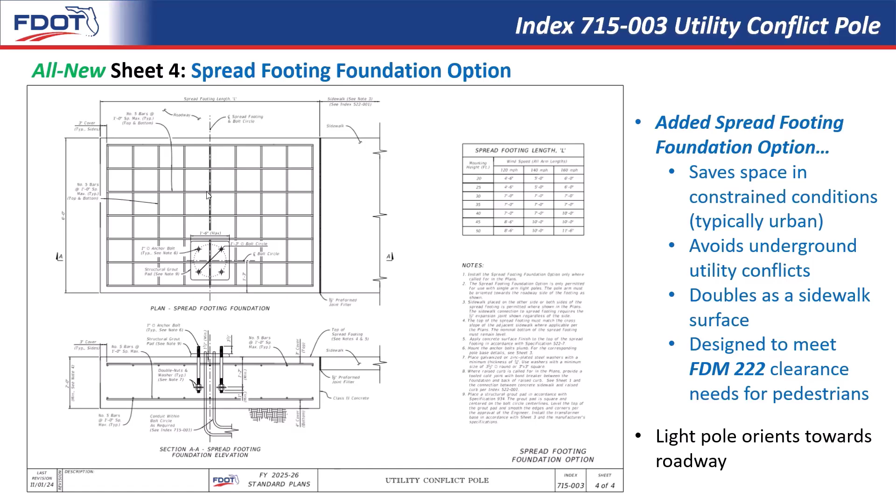And then last, there's a note to explain that the light pole does orient towards the roadway. That's how this is designed to function. Roadway's up here, the center of the upright is here, and then the arm is positioned projecting out towards the roadway, which is towards the top of this page. And so that's the end of my revision update content.

For this audience, I'm really happy to make this training announcement. We provided live, a couple months ago, the FDOT roadside barrier design training, and now that video webinar is available online. That training I'd generally describe as beginner to intermediate level, but really all designers can probably get something out of it. It covers FDM 215 for roadside safety, the usage needs of the barrier, the length of need of the barrier, and general requirements. It takes a look at the standard plans for guardrail, concrete barrier, and pier protection barrier, and even crash cushions, and how all those things tie together.

When hosting it live statewide, there were about 600 attendees, so I was very happy with that turnout. It was a really good experience. We have little quiz questions embedded throughout, which are a great review. I've been told the quiz questions are challenging, but that's great, because if you don't get it right, you tend to remember it.

That video webinar, now posted online, still has those embedded quizzes for you to take at your own pace. You just hit pause and try to answer the question. It's a nice review. There's no quiz required to get the PDH credits, nothing official about it. It's just kind of a fun game to keep you motivated and moving forward.

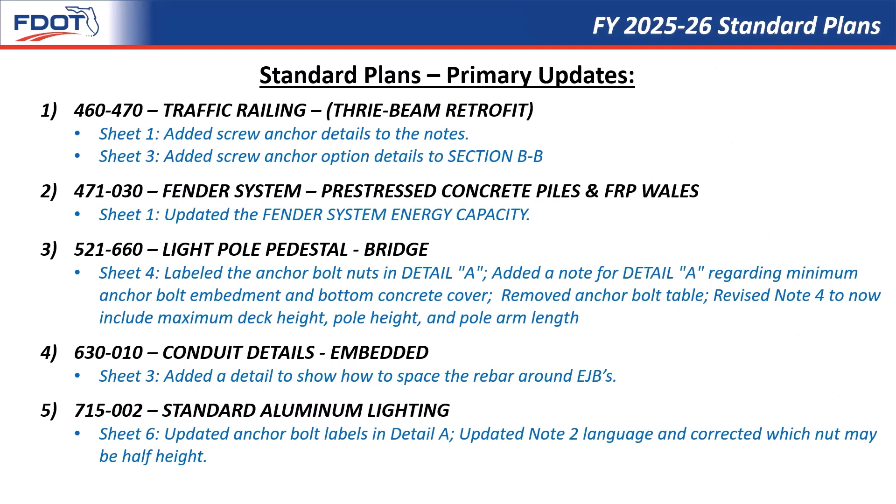Many of the changes for this cycle were corrections or clarifications, so I won't go over them here, but I invite you to review them on the Standard Plans website. Today, I want to bring to your attention these 5 changes, which we will go through next.

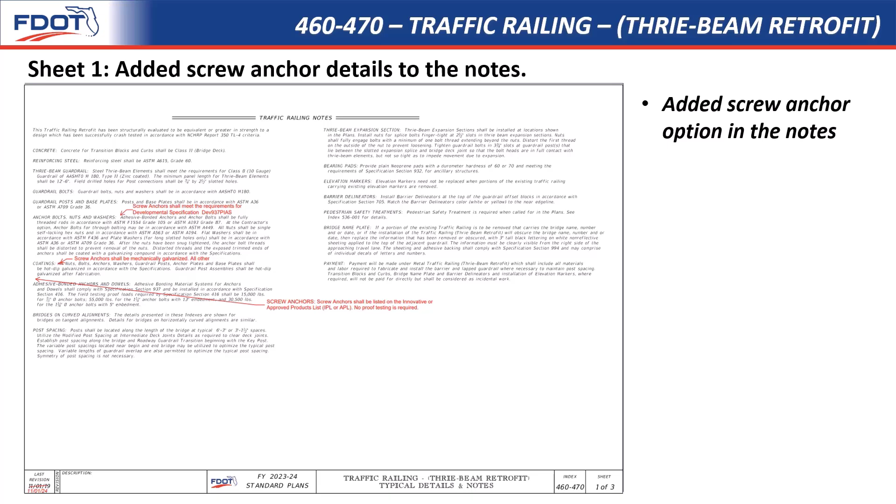The first change is to Standard Index 460-470, Traffic Railing Thrie-Beam Retrofit. We have added an option to use screw anchors for the posts. The approved anchors should be found on the APL. Here we have adjusted the notes to show the inclusion of the screw anchors.

We have updated the details as well to show the addition of the screw anchor option. As an example, here in sheet 3, we have updated section BB to show the addition of that screw anchor. What you're seeing on this sheet in the top left are the posts, which the Thrie-Beam pictured over to the right is attached to. The post must be anchored to the ground, and the way we have depicted it in the standard is that we've modified the details so that they show the original adhesive anchor construction, but with dashed lines and additional annotations to indicate how you can modify the construction to use the screw anchors.

As a little aside, some of you might ask, why are we adding screw anchors in the first place? This is a great question and one I have a lot of personal experience with. Early in my career, I spent a great deal of time in the field doing structural inspections. I've inspected hundreds, if not thousands, of post-installed anchor installations. 95 out of 100 were installed incorrectly. I'm exaggerating, and that's a number I just made up, but it was something like that.

If you've ever been involved with adhesive anchor installation, you know that there's a specific process you must adhere to. First, you drill the hole, and then you have to blow the hole out with compressed air at a specific minimum pressure for a minimum time, something like 80 psi for 5 seconds. Don't quote me. Then you have to take a wire brush and brush the hole a number of times, let's say 20 times. Then you have to blow it out again with that same specific compressed air and time. In many cases, the hole must be dry, clean, and free of any oil or debris.

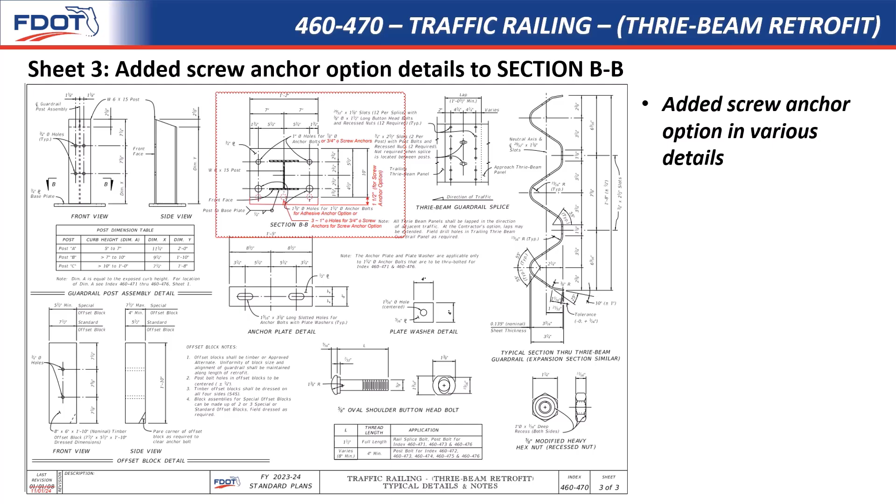It turns out the contractor didn't drill the holes deep enough, probably hit rebar or something, and instead of fixing the problem, cut the screw anchor short and then installed them. They missed some of the evidence though, so I guess no plan or system is foolproof. However, all taken together, I do like the screw anchors far more than the adhesive ones.

This means that as of right now, since we've made this new change, the manufacturers of the screw anchors have not come on board with fully approved APL applications. This being a new change, that's not surprising. We should expect some lag time for manufacturers to apply and get posted to the APL. I just wanted to give you a heads up in advance so you don't go here thinking you did something wrong.

The next change to discuss is to 471-030, Fender System Pre-Stressed Concrete Piles and FRP Wales. Here we have updated the Fender System energy capacity from 38 kip feet to 50 kip feet. This was based on new research completed by the University of Florida. Please contact me if you'd like a copy of the research.

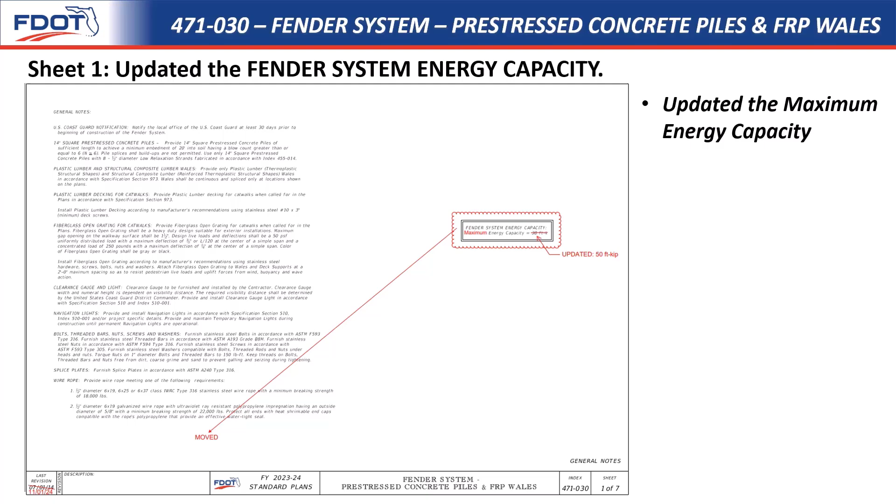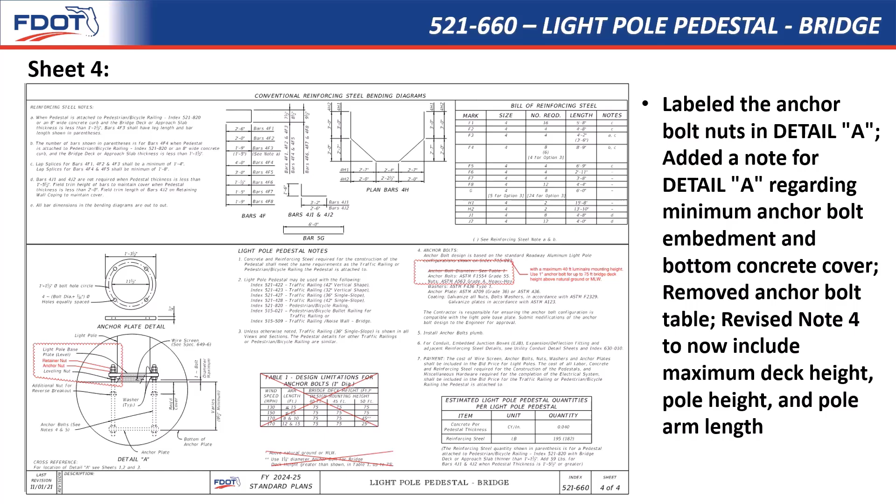For 521-660, Light Pole Pedestal Bridge, we have made some adjustments to the light pole and anchor bolt information. We indicated that the maximum mounting height of the light pole is 40 feet, for which the standard was designed, but which was not clearly identified before. We removed the anchor bolt table because it added to this confusion by offering anchor bolt options for pole heights which were not designed for. Instead, we give the anchor bolt information directly in the note. In addition, we have labeled the nuts on the anchor bolt accurately to correspond with the specification update to the anchor bolt nut tightening procedure.

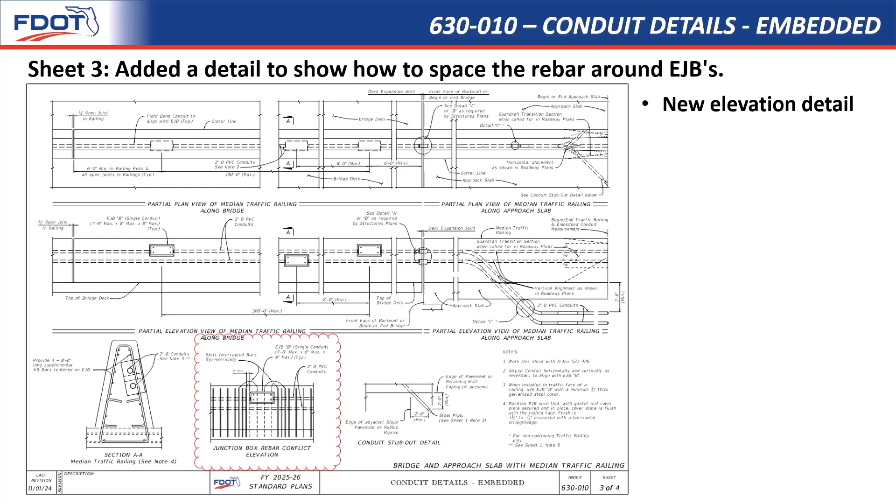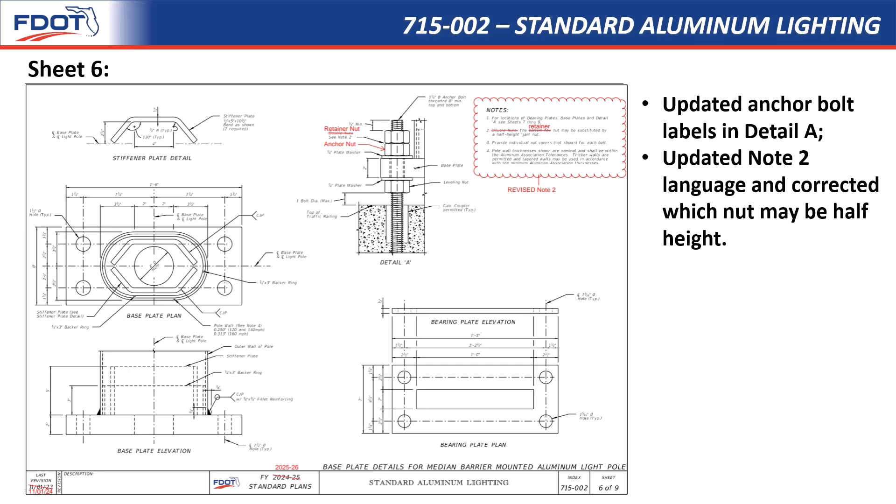And that's it. Like I said, many of our changes this year were clarifications or corrections, which you can review in detail on the website. But I wanted to make special note of the ones discussed today. If you have any questions or comments, you can reach me via phone or email, and I'll be happy to take your call or correspond with you. Have a fantastic day and design well.